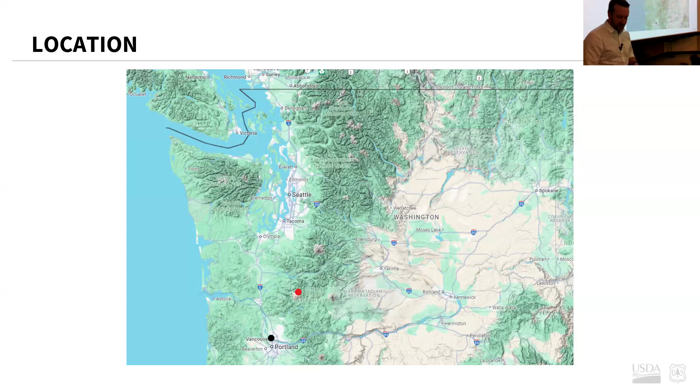So to orient you as to where Spirit Lake is, this is a map of Washington. The black dot down near Vancouver is where our office is located. And the red dot just north of Mount St. Helens is approximately located where Spirit Lake is. So the project is located on the Mount St. Helens National Volcanic Monument of the Gifford Pinchot National Forest. And that essentially means there's a few additional constraints we have with regard to producing projects within the monument that I'll discuss later.

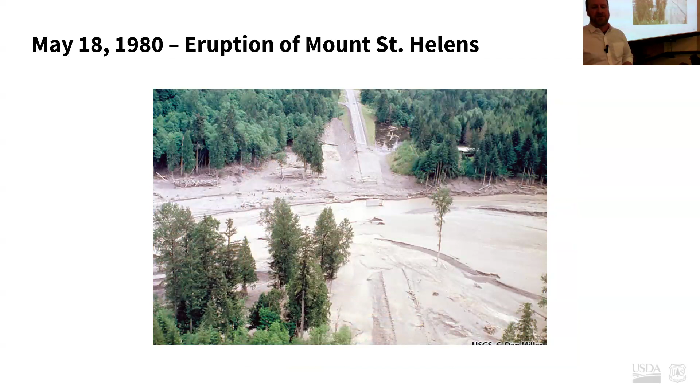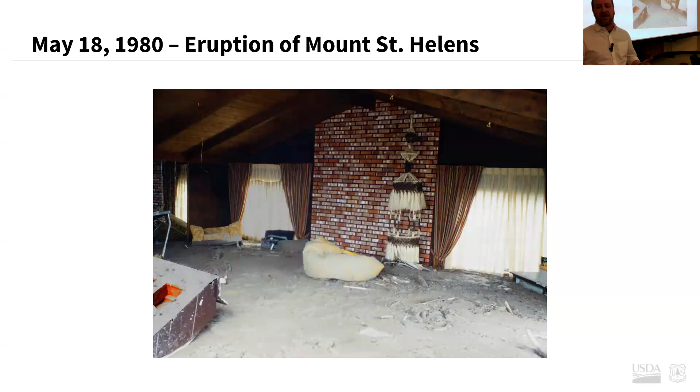So the May 18th, 1980 eruption of Mount St. Helens resulted in some very dramatic changes across the landscape of Southwest Washington. Over 150 square miles of forest were destroyed. Over 150 new lakes and ponds were formed. Rivers changed their courses. The bed of the Columbia River at the Cowlitz rose by 30 feet, and ashfall reached as far as Montana. Additionally, there was a lot of property damage to hundreds of homes, bridges, and roads. Highways were closed for a week, and airlines canceled over 1,000 flights. So pretty big impact to the local area.

Unfortunately, and most sadly, 57 people lost their lives because of the eruption. And even today, it's still considered one of the most disastrous volcanic eruptions in US history. And this last photo just shows some barges dredging the Columbia River post-eruption.

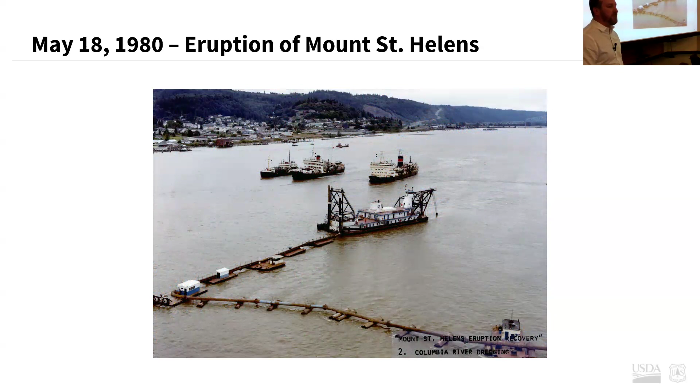Okay, so this video, courtesy of the US Geological Survey, is a composite of multiple images taken during the eruption. I am not a volcanologist, so I will stumble my way through this, but essentially, an injection of magma at shallow depth created a large bulge on the north flank of the mountain. A subsequent earthquake caused the entire weakened north face to slide away in a sector collapse, which ended up being the largest subaerial landslide in recorded history. And I'll just hit play on this again so it keeps looping.

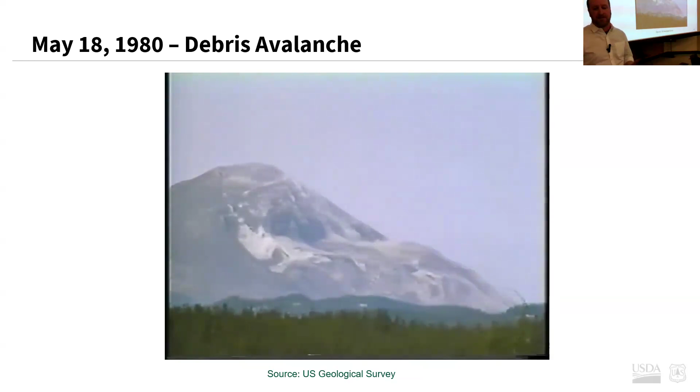So this allowed the partly molten rock, rich in high pressure gas and steam, to suddenly explode northward towards Spirit Lake in a hot mix of lava and pulverized rock, which overtook the landslide. Then an eruption column rose 80,000 feet or 15 miles into the atmosphere, depositing ash in 11 US states, as well as certain provinces of Canada. At the same time, existing snow, ice, and several entire glaciers were caught up in this surge, forming a series of large lahars that reached as far as the Columbia River, nearly 50 straight air miles. It's a lot more in river miles to the southwest.

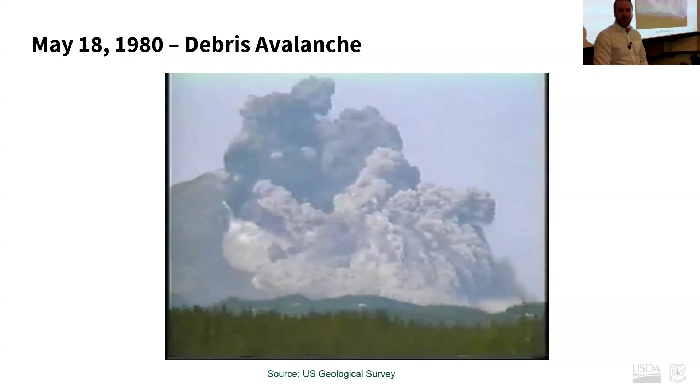It's important to note that the eruption occurred in some separate, what I'll call phases, which I'll describe a little later. And these phases had some very serious ramifications for some of the engineering considerations in managing those geohazards in the North Fork of the Toutle River.

So this map, again from the US Geological Survey, shows just how far reaching that eruption was and how far those lahars went. You can see in this image, lahars went down both the South Fork and North Fork of the Toutle River, where they converged, entering the Cowlitz, going both upstream and significantly downstream to the Columbia, where that lahar actually flowed upriver quite a ways. So a lot of energy in the system to enter into a river like the Columbia and move upstream.

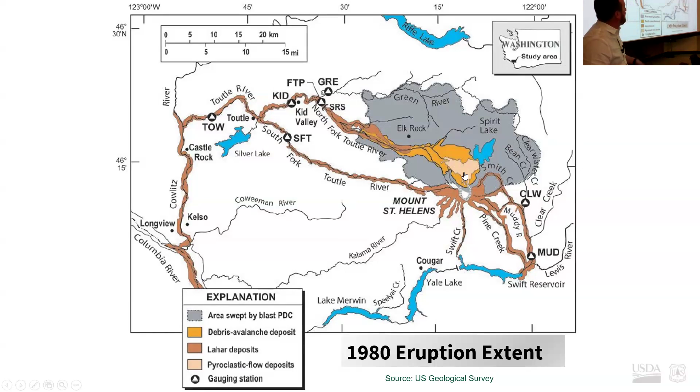So the rest of this presentation really is going to focus on this debris avalanche that resulted from the eruption that blocked the natural outflow of Spirit Lake, which was the North Fork Toutle River Valley. And here where the USGS has mapped debris avalanche deposits, that's pretty much the entirety of the debris blockage that we'll be talking about later today that blocks Spirit Lake to the North Fork of the Toutle River.

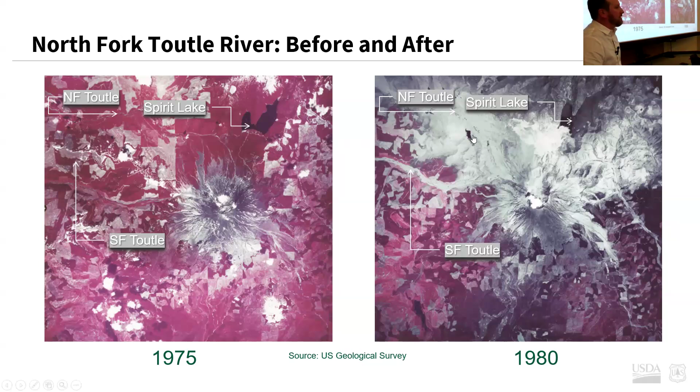You can see the debris or the lahar that went down the South Fork and North Fork of the Toutle. And it's maybe not so obvious in this photo on the right, but you can see that the area of Spirit Lake was increased substantially. We'll talk a little bit more about that. And then this little feature here stands out as well. I'll discuss that in a minute.

Just another aerial image, showing what the lake looked like pre-eruption versus post-eruption. Again, I think this image really shows just how much that area changed, and there was subsequently a volume change associated with a 200-foot raise of the bottom of the lake elevation. So it went up 200 feet, and the landslide or the debris blockage that ended up blocking the lake is about 500 feet, give or take a few tens of feet, thick at its maximum downstream of the lake.

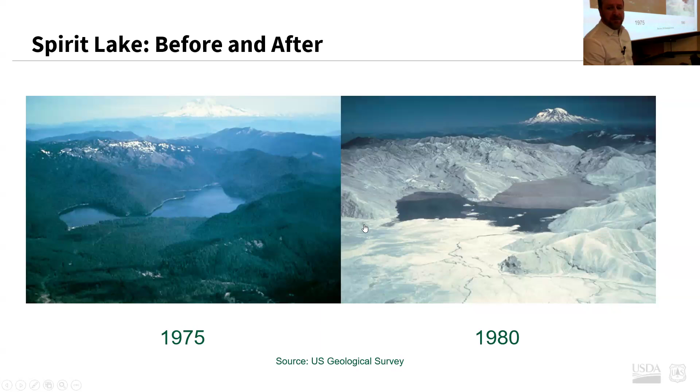So I pointed out a unique feature in one of those false color images previously, and that was Castle Lake. So in addition to Spirit Lake being raised up, increasing its volume and area, it actually created two new lakes. Prior to 1980, Coldwater Lake and Castle Lake did not exist. In this Google Earth image, you can see the maximum downstream extent of the debris blockage. Toes here. If you've ever been up to Johnston Ridge Observatory, this is State Route 504 that will get you up to Johnston Ridge. And basically the end of the Hummocks Trail is right in here. So if you're familiar, that's what we're looking at. So we went from one lake to three.

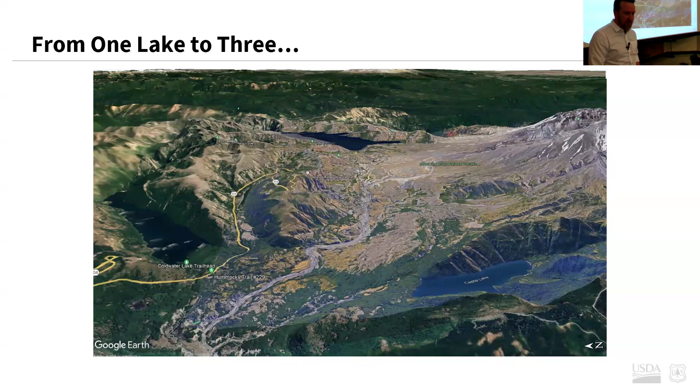I won't go into great detail here, but in addition to managing Spirit Lake, the U.S. Army Corps of Engineers also constructed outlets for both Castle and Coldwater Lake that require annual inspections. My understanding is that Coldwater Lake is founded on some really good rock, so the channel is very stable, whereas Castle Lake has a similar material characterization to the debris blockage. So we do periodically inspect and monitor for that. Fortunately, we haven't had any events. USGS has done some modeling of Castle Lake, and from what I've been told, it's not nearly as dire a situation as a catastrophic breach of Spirit Lake. But nonetheless, we still monitor those two lakes as well.

So I'd like to quickly go back to the comment I made earlier about the eruption occurring in phases. This figure from the USGS shows that there were three distinct phases of the eruption. The first was that debris avalanche that consisted of large blocks of the inner and outer edifice of the mountain. The second phase was a lateral blast in the form of a pyroclastic density current, or PDC, which was directed northward, which resulted from a large release of volatiles from the sudden unroofing of the magmatic and hydrothermal systems within the volcano. And then the third phase of the eruption was the billowing column that deposited a significant amount of ash over the top of both of those deposits.

And then there were several later pyroclastic flows, over the course of definitely a few months, possibly up to a year, that continued to slough off down the mountain, adding more fine-grained, highly erodible material on top of that debris blockage.

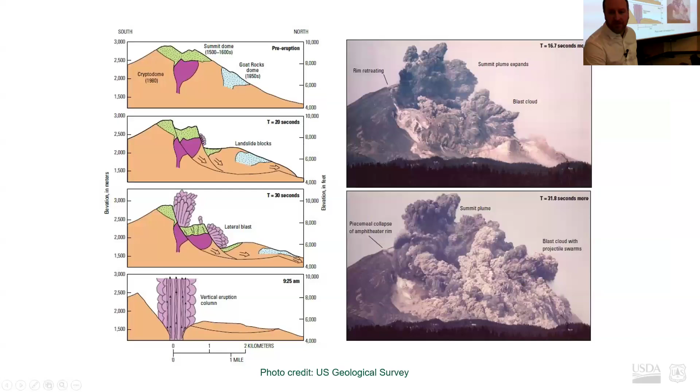So the end result of that eruption essentially became an unengineered earthen dam holding back a much larger volume Spirit Lake. And because of the differentiation of material between the initial and subsequent eruptions, the resultant engineering characteristics between the debris blockage layers is highly variable, as you can see from this table that kind of shows the constituent parts of those deposits. The debris avalanche itself is dominantly heterogeneous, gravelly sand.

Sorry, actually went to the wrong slide there.

Yeah, heterogeneous gravelly sand, but contains silts and clays, as well as rocks that are several feet in diameter. The blast deposit consists of a lower unit of angular, unstratified, clast-supported rock debris larger than coarse sand, which is overlain by an upper unit of silt to sand-sized sediment composed of ground-up bits of rock. And lastly, the ash cloud deposit is composed mainly of sand and silt.

And so due to concern that rising lake levels could eventually either overtop this loose, unconsolidated material, or that seepage and piping could potentially initiate a nick point that could then come back towards the lake, the U.S. Army Corps of Engineers, U.S. Geological Survey, and others basically said, hey, we should probably characterize this debris blockage, figure out if this is a big concern, and we probably should do something about it.

So they did some early geotech investigation in the 80s to characterize that blockage. They identified the contact boundaries that you see in this diagram and elevations for each of those layers. They conducted hydrogeologic and seismic modeling to develop conservative, maximum safe levels of that lake. So those initial 1980s design assumptions are still in place. So some of those lake levels are still founded on work by John Sager and others from the 1980s. And so basically they said, yeah, this is a concern.

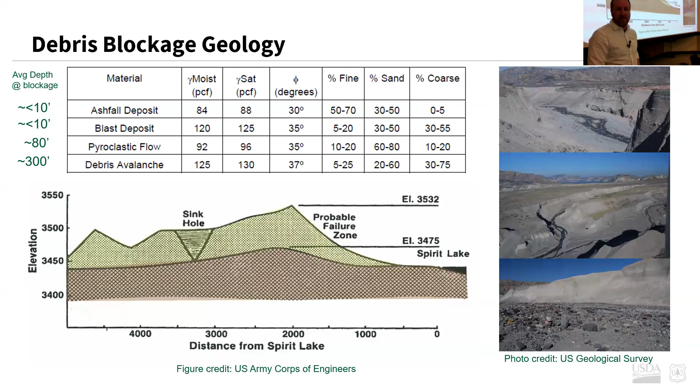So initial inundation mapping conducted by Swift and Kresch in 1983 from the U.S. Geological Survey, as well as a recent study that the USGS has currently got pending review, indicates that a hypothetical breach of the debris blockage would essentially follow the exact same path of the 1980 eruption. And so what you're seeing here on the left is just a plate that shows all of the other plates of inundation maps that were created in 1983.

On the right, what you see is the inundation map for the Longview area. So down here on the left, if you've been to Longview, this is the wagon wheel in town. And anything in between these two lines is indicated as being inundated by floods. I don't know if folks online or anybody in the room can read the graph, but right about here, this indicates that the depth of the mud flow at this location, right when it comes out of the Cowlitz River Valley into Longview, would be 60 feet in depth.

So very substantial. And the reason for that is there are many downstream populations at risk that include Toutle, Castle Rock, Kelso, and Longview, with a combined population of over 50,000. That 50,000 is an old statistic. I want to say it might be closer to 75,000 today, but there's a lot of people down there.

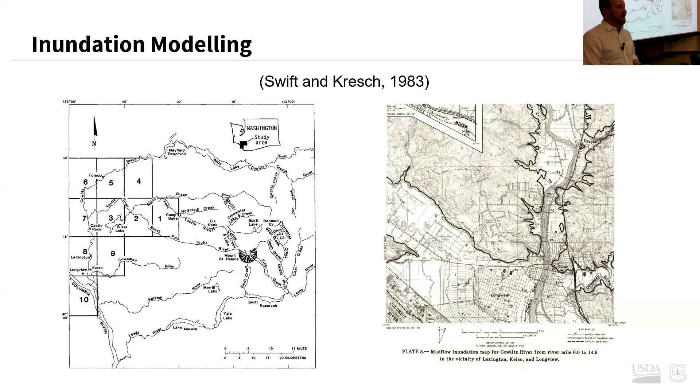And elevations determined by the hydraulic routing of the mud flow were used to prepare these maps. And essentially, it would be 60 feet of depth at Castle Rock and Lexington, 30 to 40 feet at Toutle Lake and Kelso and Longview, and 15 to 20 feet in Toledo. So obviously a very high hazard with a high potential for damage and loss of life.

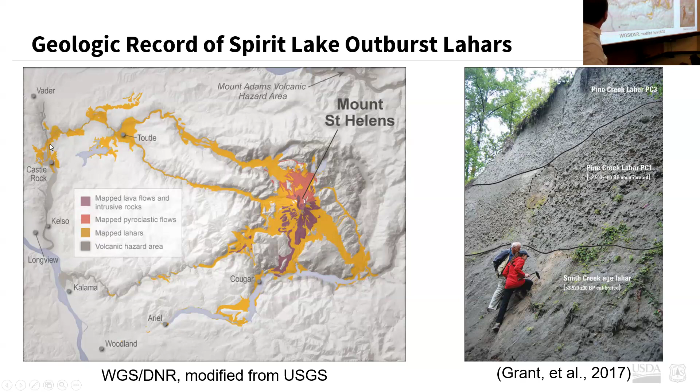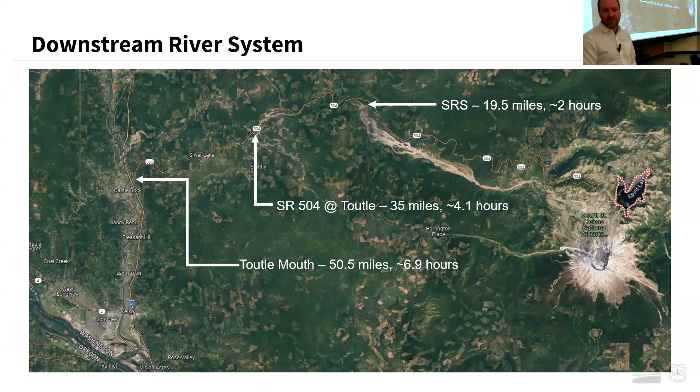But in addition to the populations downstream, there's a lot of other stuff besides the SRS. There's a lot of recreational facilities both on and off of National Forest System lands. And there's a significant amount of critical transportation infrastructure, including Interstate 5, Washington State Route 504, railroads, shipping channels, and port facilities. So yeah, it's risky.

So understanding that an engineered solution would take a significant amount of time to produce conceptual designs, conduct field reconnaissance, perform geotech investigations, and provide initial through final design, and then finally complete environmental permitting, scientists and engineers understood that they needed an interim solution to manage Spirit Lake before they could design and construct the final solution. So what happened was they mobilized, they built a pumping facility, and this facility included 20 large barge-mounted 10-inch pumps that were capable of producing 110,000 gallons per minute or 245 CFS.

And the pumps discharged lake water into a 5-foot diameter, 3,500-foot long buried conduit, which then entered into a stilling basin before being discharged back into the North Fork of the Toutle River. So as you can imagine, trying to mobilize this amount of equipment and supplies and build it across a devastated landscape, even just getting there, building the road to install these facilities was quite the feat of engineering that continues today.

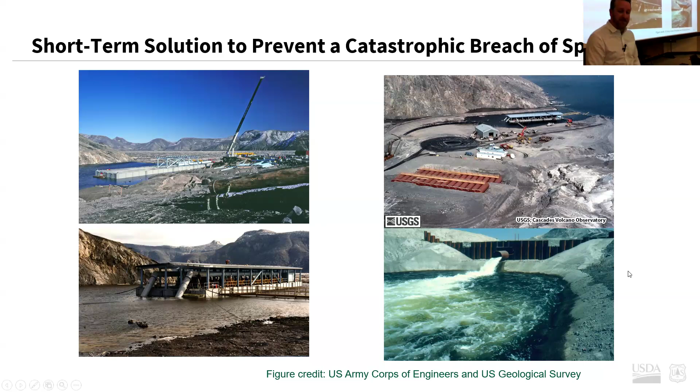In 1982, just so happens to be the year that I was born, at the direction of President Ronald Reagan and the Federal Emergency Management Agency, the U.S. Army Corps of Engineers, in consultation with the Forest Service and U.S. Geological Survey, initiated planning to develop a long-term solution to managing water in Spirit Lake that would prevent that catastrophic breach of the debris blockage.

But yeah, where was I?

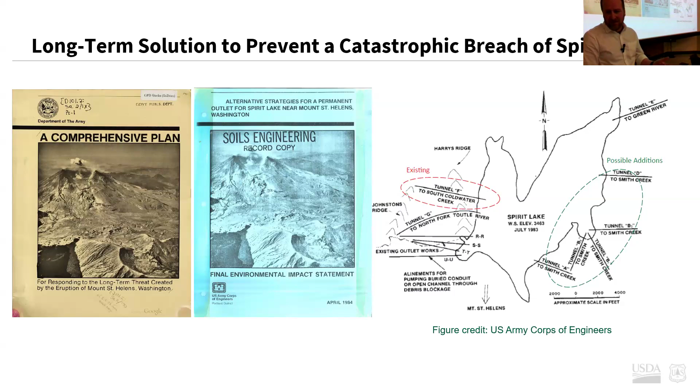Yeah, so they ultimately landed on the Spirit Lake Tunnel. So in order to build this thing, they started construction July of 1984 and completed it relatively quickly in April of 1985. The construction primarily used an 11-foot diameter tunnel boring machine, or TBM, and then 3 types of tunnel support systems were used depending on the rock conditions they encountered.

The entire tunnel invert, or the bottom of the tunnel, was lined with precast or cast-in-place concrete, and in good rock, which was about 55% of the tunnel, they didn't use any treatment on the walls or the crown, so it's basically just open rock. It was decent rock. In fractured rock, which was 35% of the tunnel, the walls and crown were covered with a minimum of 2-inch steel fiber reinforced shotcrete, so basically just getting across the walls, keep the spalling down.

And then lastly, in sheared rock, which is the worst rock type they encountered, which accounted for about 10% of the overall tunnel, a rib set shotcrete support system was used for the walls and the crown with a 285-degree coverage on the walls and the crown. So tunneling progress when they built this thing was pretty good, with the exception of what they call the JKL. I believe it stands for Julie, Kathy, and Linda. I don't know if they were geologists or drillers, who they were, but these ladies got a shear zone named after them. So the JKL shear zone, which I'll describe in the next slide.

And so prior to encountering this shear zone, their tunnel advancement rate had been 5,834 feet in 11 weeks. However, once they reached the JKL shear zone, the TBM got stuck for 2 days, and it took 4 weeks to advance the next 235 feet. So yeah, pretty substantial change in the rate of advancement for that TBM.

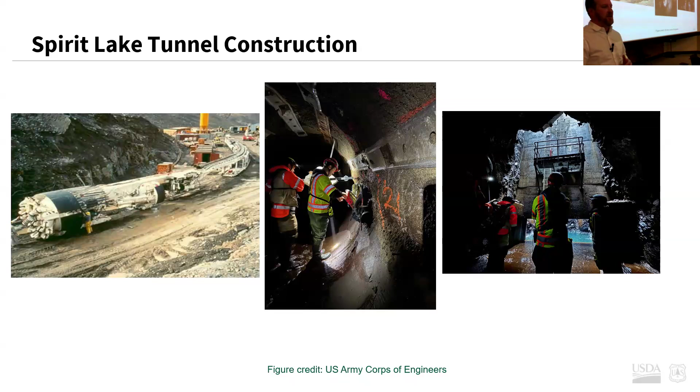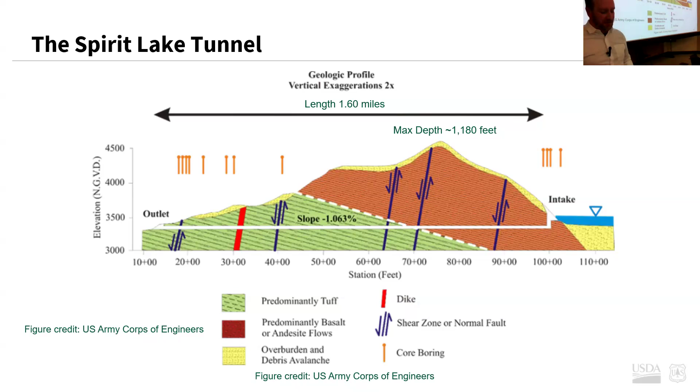So in an emergency, we have to get across Spirit Lake. That sounds like it shouldn't be a big deal, but other than the 1980 road that has been rehabilitated after they did the pumping station and completed the tunnel, we have to take a road that has been closed for a long time. We had to rehabilitate several miles of this road to get heavy equipment, other things down. Then we built a UTV trail by hand, mind you, which every year we get these massive flows coming out of the volcano, covers this thing back up. We can't take equipment because it's in the Mount St.

Helens National Volcanic Monument. So I get to take a crew of people once a year, go out and do manual labor to clear this thing out. It's quite impressive. It usually takes a full day, but sometimes more. So then once we get down this UTV route, we then transfer into a boat, which we couldn't drive down there. We had to get it airlifted in with a helicopter.

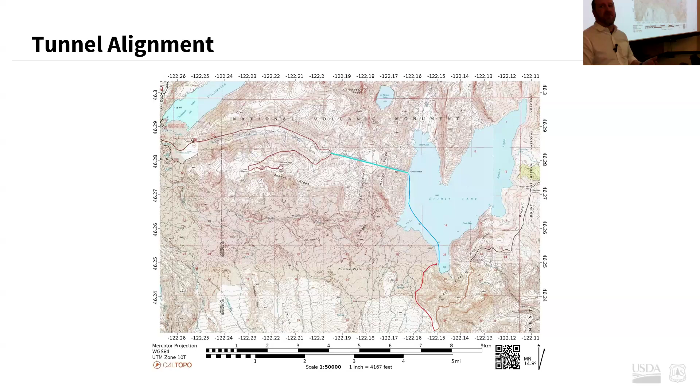I might have some photos in this later for you to show those conditions. But yeah, that's what I wanted to show on this. So when we talk about the long-term outflow solution, for us, access is a critical component of whatever we end up deciding on for an alternative.

But what's important to note here is that we have a single fracture critical steel gate on this thing to operate, to keep the flows. We keep it open all winter long so that as we get those typical winter storms, the lake level can come up, but then get out of the lake and keep the levels down. But one time we did an inspection a few years ago, and an Army Corps of Engineers structural engineer was looking at that gate and said, "Why would you guys ever get behind that thing?"

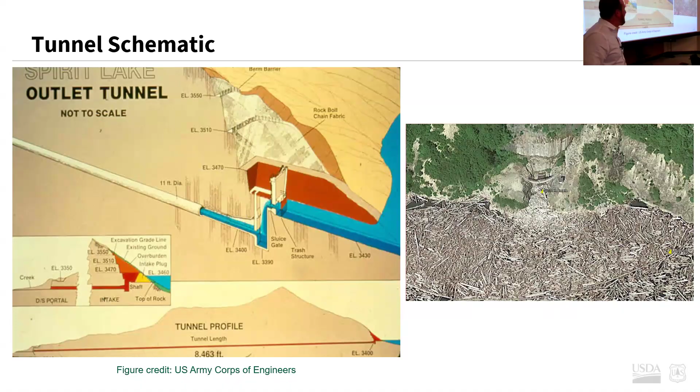And that was the impetus for a $30 million project that we're currently working on to replace this single fracture critical gate with a double redundant 4-gate system. So I could go on a lot about that project as well, but in the interest of time, we don't have it. So. All right.

The heave began long ago due to high ground pressures, the weakness of the sheared tuff dipping beneath the tunnel, the adverse orientation of fractures in the basalt, and the absence of those steel rib sets that I mentioned earlier. So for several years, the amount of heave remained very steady at about 24 inches. The distress was limited to the tunnel invert, so we didn't see anything on the walls or the crown. It literally was just coming up off of the floor.

So the ramification of having a smaller diameter tunnel is that we can no longer operate that at maximum design outflow capacity, which, if we have a very significant hydrologic event in the Spirit Lake Basin, it could exceed our ability to pass that through the outflow.

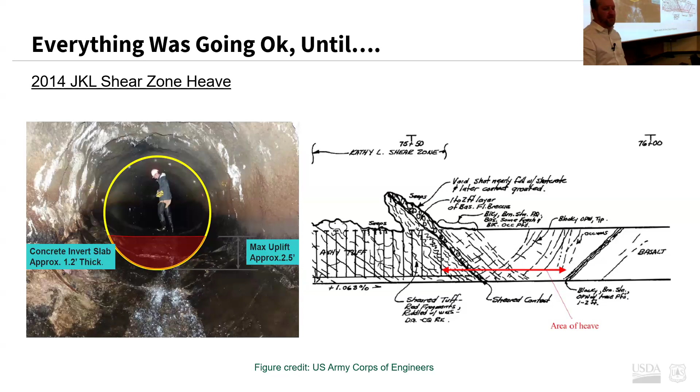So then Congress got involved. This is really when the agency started making a lot of moves to get some things done. So on September 24th of 2015, we received a letter from Representative Jaime Herrera Beutler, Senators Patty Murray and Maria Cantwell, directing the Forest Service, Army Corps of Engineers, and US Geological Survey to develop a long-term resilient solution for management of lake levels, which led again to significant agency efforts to establish baseline information and initiate that planning.

The Forest Service requested the National Academies of Sciences, Engineering, and Medicine to convene a committee to help develop a decision framework, because I won't go into a lot of the politics behind this, but there are a lot of interested parties, a lot of regulatory management, a lot of private interests downstream of National Forest System lands. So ultimately, the Forest Service has the sole responsibility of making a decision that impacts 1 million people who have 1 million opinions on how this should be managed.

So I won't get into it too much, but that's what NASEM, or the National Academies of Sciences, Engineering, and Medicine, helped us figure out. And they gave us this decision framework for managing Spirit Lake. If you ever want to know more than you ever care to know about Spirit Lake, this document, and then this one here by Gordon Grant and John Major, and I apologize, I forget the third off the top of my head, I think Sarah Lewis maybe, are very comprehensive about Spirit Lake and the debris blockage. So yeah, more information, highly recommend those documents.

But yeah, this was the impetus for us to start our planning. So that's what we're currently doing now. And our project objective is to create a long-term outlet configuration that removes that threat of the catastrophic release for Spirit Lake. So we call this the Spirit Lake Outflow Safety Improvement Project. I just like to refer to it as SLOSIP because it's a lot easier to say. So yeah, we started that in 2020. We awarded a $2 million contract to prepare an environmental impact statement to comply with the National Environmental Policy Act.

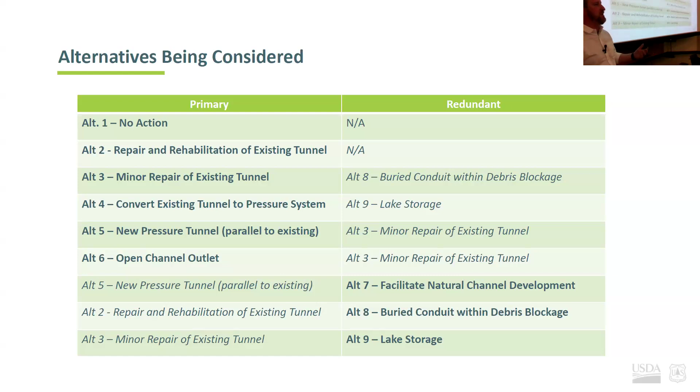They considered several outlet options. Some of these are still there. So previously I mentioned a buried conduit. I talked about a permanent pumping station, talked about an open channel. All those were kind of carried forward. And the NASEM Commission also identified a few options that should be considered for long-term management of risk. So again, apologize for the wordy slide. I'll actually describe these in a little bit more detail in the following slides.

So the National Environmental Policy Act requires a no action alternative be analyzed to show how doing nothing would fail to meet the purpose and need of any federal project, which in our case is again creating that long-term resilient outflow that removes that potential threat. So by doing nothing, essentially we're telling the public that we wouldn't be able to do that. We can't reduce your risk if we don't do anything. We have to do something.

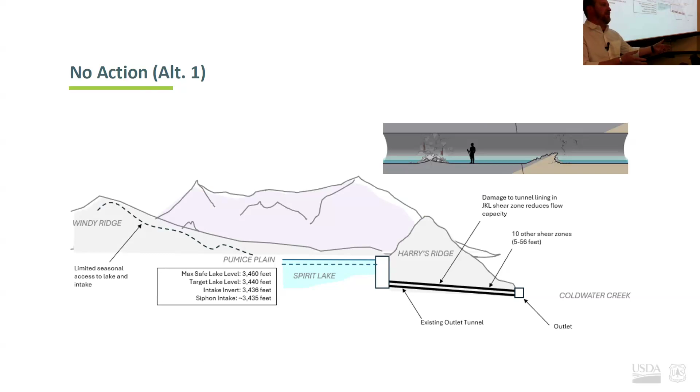And again, the no action alternative also gives you a baseline to compare effects. So what would the effect of not doing anything be on the community versus what you're planning to do? So alternative 2 is the major repair option. This is a full rehab of the existing tunnel, including enlarging that constricted JKL shear zone to restore our full tunnel capacity. The shear zone would be using the same methods that they used before to repair those rib sets, and they would just extend that out. Alternative 2, coincidentally, does not include a redundant option.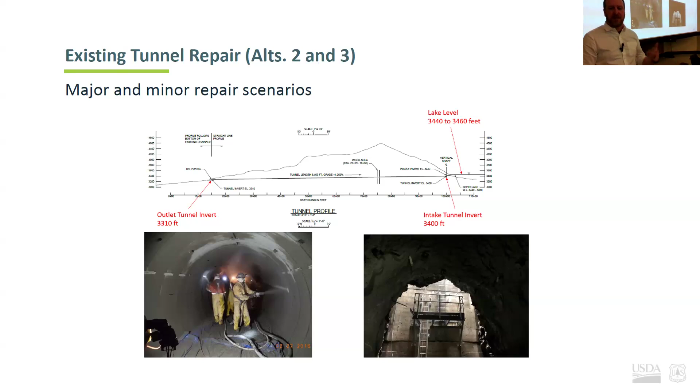Alternative 3 is a minor repair option that would focus only on that JKL shear zone, and it would construct a buried conduit across the debris blockage. So essentially, if you think about a concrete box culvert, it would just be buried and connected across the debris blockage. That would be the redundant measure. And then that essentially would follow the existing path of the old disturbed area from the 1980s pumping station.

So alternative 4 is to convert the existing tunnel into a pressure tunnel. Essentially the difference between a pressure tunnel and a gravity tunnel is that with a pressure tunnel you can control the bottom, you can fully fill the tunnel and pressurize it. So it allows you to get, number one, higher discharges, and we could access it from SR 504. So that accessibility is a major consideration for us.

In addition to those considerations, it also would lower the intake level, which would then also allow us to lower Spirit Lake below 3440. And the reason we're stuck at that 3440, as I showed the inlet earlier, that excavation is actually graded towards the lake. And so that maximum elevation before it gets into the intake is 3440. So by putting in the pressure tunnel, we could excavate that out, lower the intake slightly, and we could lower the lake a little bit more to buffer those intense hydrologic events that could come in.

There's a lot of other considerations that I won't go into great detail. The log mat, though, is one of them. So anything that goes into a pressure tunnel has the potential to do catastrophic damage. So it would take a lot of work on the front end to make sure we don't get anything going into the tunnel.

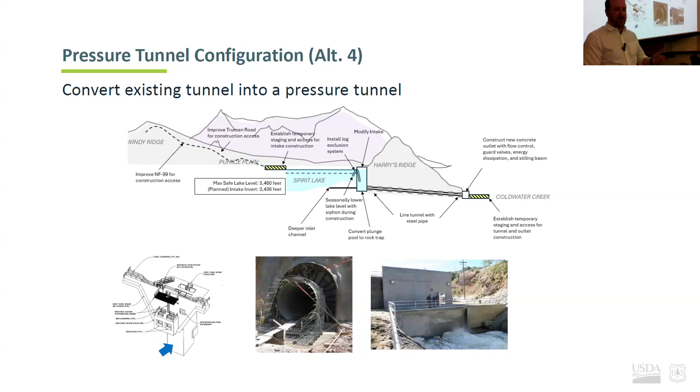So alternative 6 is that large open channel that would maintain Spirit Lake at its current operating level of 3440. Based on preliminary alignment, it looks like this open channel would be 6,450 feet long with cut slopes up to 250 feet vertical. Massive, massive cuts in what is presumably very unstable material that has not been characterized. So a lot of unknowns on that one.

But the benefit of this measure is that channel flow capacity would scale with lake level and really is only limited by channel dimensions. So rather than having to worry about the lake level rising, the lake would just flow out even if we do get those extreme events, much like a natural river system would. The channel would require channel bed reinforcement to provide that erosion resistance to prevent a nick point from coming back up, retrogressing and releasing the lake.

So here's the really big one, Scott. Channel construction would excavate 11 million bank cubic yards, which would result in 22 million loose cubic yards. That's enough to fill Spirit Lake. And where do you put that much stuff? And just the infrastructure to haul it out, that heavy haul equipment, you need a massive, beefy road. And we don't have a location where we would put it. So we are still considering this option. It is viable, but obviously a lot of things to consider before we could do that.

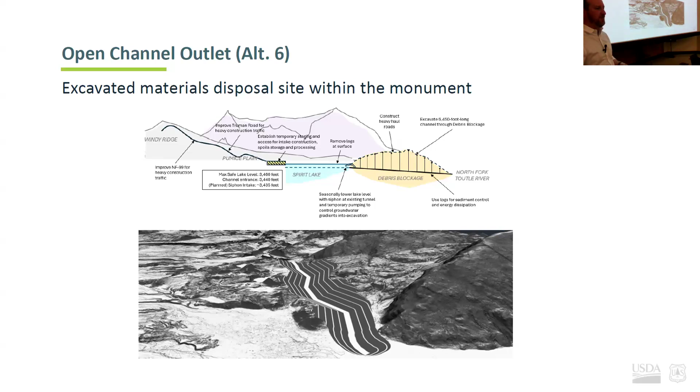And then the backup for this one would be that we would use the existing tunnel as that backup. So if for some reason that channel failed, or let's say there was another lahar that blocked it, a debris avalanche that brought us back to the same situation, we would still have the existing tunnel as an alternate.

All right. So then alternative 7 is a natural channel development. We would include a new pressure tunnel, which would follow the existing alignment of the current tunnel. The reason being is that it's already been well characterized.

We understand the geology really well, so that is like an ideal location to put it. And then we could use the existing tunnel as a backup as well as access. And the interesting thing, our consultants kind of came up with this in talking with some of the folks that are on one of our collaboratives. Colin Thorne does a lot of sediment modeling, kind of pitched this engineering with nature idea.

But essentially what you could do is there's a series of depressions across the debris blockage. And if you were to initiate some natural channels to kind of connect these, you could potentially, with the use of a siphon, put water through this, controlled over time to kind of slowly start initiating a natural channel. And you would still have, again, your pressure tunnel and existing tunnel as a backup outlet.

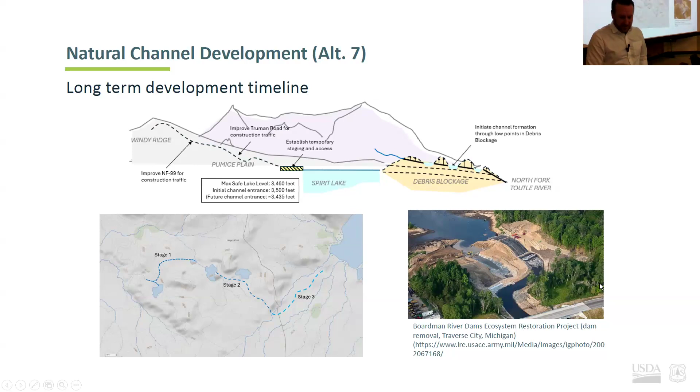And over time, you could release water out of the end of that conduit. As the erosion from that flow coming out of the end of the conduit stabilizes, you could then excavate that next upstream section of conduit, remove it, allow it to do the same thing, controlling those flows. And so you could stage letting hydraulic excavation work naturally in your favor.

The obvious ramification of this is that all of that sediment from that debris blockage that you hydraulically excavate out, where does it go? Right down to the Columbia River. So yeah, that is alternative 8.

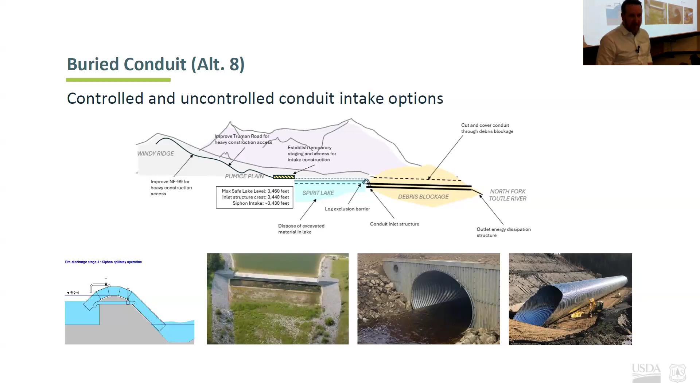Lastly, alternative 9 would basically reevaluate the debris blockage stability by conducting updated geotech investigations that would gather data in support of updating groundwater and seismic modeling. And if the results of that updated modeling indicate that conservative design assumptions made in the 80s are no longer valid or just didn't come to fruition, then it may be possible to increase the maximum safe operating levels at the lake, thus increasing the storage buffer to accommodate those extreme hydrologic events.

However, this would require a complete redesign of the current intake structure. And we may have to do additional stabilization at some of the critical low points, which are shown on the right here, critical point north and critical point south. This LiDAR image just shows the lake level if we were to raise it up to 3480, which is currently 40 feet higher than our current operating level.

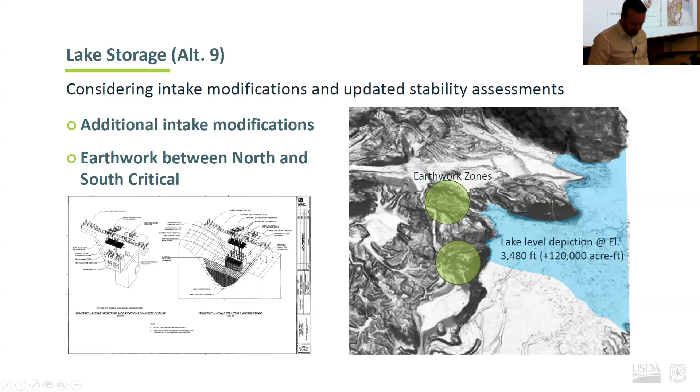And then this image put together by our contractor just shows most of these options. So again, here's the south shore of Spirit Lake. Mount St. Helens is just to the south off of this image. The crater would be somewhere kind of down towards the bottom of the page. This shows the open cut, those 250-foot high excavation slopes where we could potentially put some engineering with nature type things.

This road is the one that we actually completely rebuilt as part of that $30 million intake gate replacement project. So this was just completed this summer. So it currently exists, but our previous NEPA indicates we will reclaim that. So the jury's still out on what we're gonna do with that road, I guess.

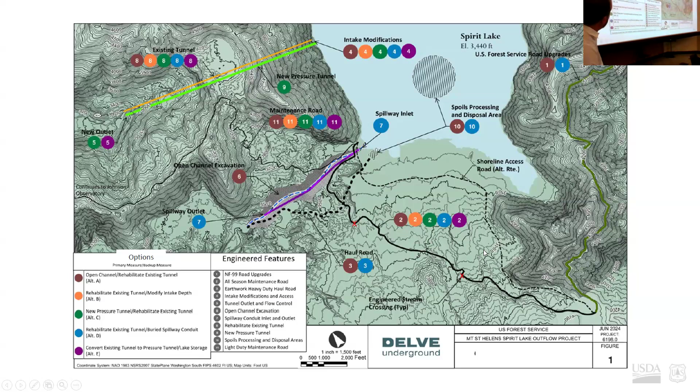So moving on. I'll kind of quickly breeze through the last of these because I realize I'm almost at time and don't want to belabor this too much, but when you're thinking about any of these alternatives, there's a number of risks that you have to consider, including natural hazards, construction risk, outlet performance, any environmental risks, which again, we might elucidate in the environmental impact statement. There are obviously implementation risks, which are unintended consequences requiring future mitigation.

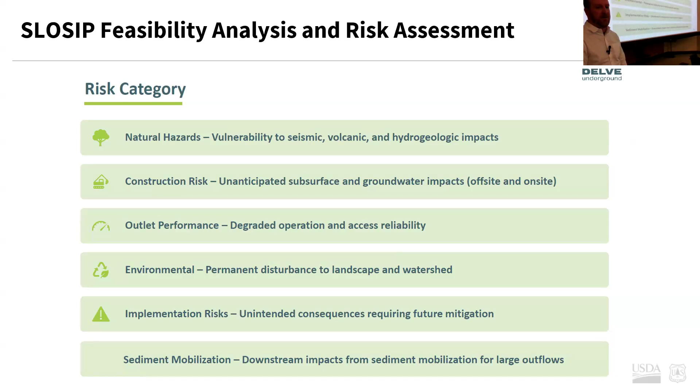And we decided to pull sediment mobilization out of the environmental, and I'll talk a little bit about that when we get there. But natural hazards include all the processes that could be reasonably expected to occur on the flanks of an active volcano, including those initiated from extreme hydrologic events, geologic processes, including local and regional stresses, mass wasting events, volcanic processes, and seismic, whether local or regional.

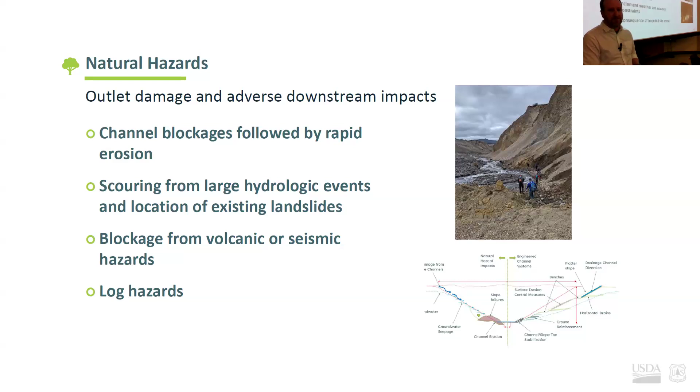As indicated on this slide, any of these construction risks could lead to significant increases in overall project costs, which underscores, in my opinion, the critical importance of a thorough surface and subsurface site characterization program. If you guys in your future career ever get pushback on how much you want to spend to do a geotech investigation, just remind them of some projects. You'll find them, about when they didn't do it right, how much it ended up costing them. So always push for more than you're going to get approved for.

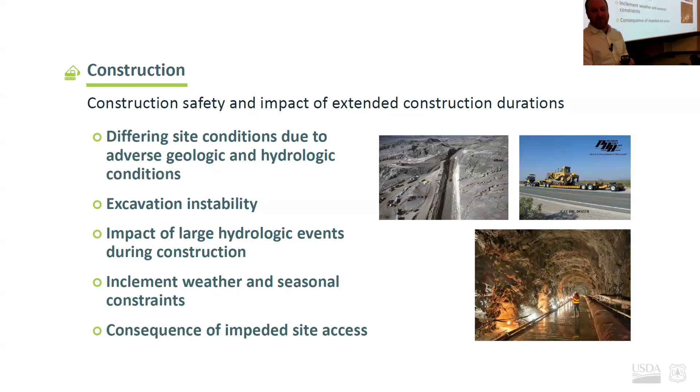Where was I? Yeah, so given the time frame required for such a large cut, it could take multiple seasons to complete construction, and you'd have to winterize the site, so you'd have to pay really good attention to ensure that critical measures are put in place to not lose your previous work that's been done in a mountainous weather environment. Regardless of the option chosen, they all have trade-offs and performance measures.

For example, an open channel would obviously be more vulnerable than the existing tunnel to a debris flow initiated from the crater of the volcano. A tunnel bored in competent rock might be less prone to damage. Sorry, I'm losing my spot here. During a seismic event than would cut slopes in an open channel.

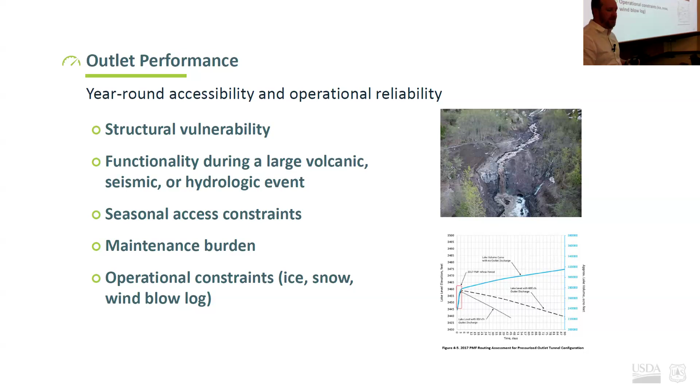And yeah, a pressure tunnel configuration with outlet valves located near the current outlet would be way easier for us to access than the existing gate control inlet. However, with increasingly complex systems, there's more maintenance, there's more costs. So every consideration, every risk has a trade-off. And to balance all of these for a project of this magnitude is definitely tricky.

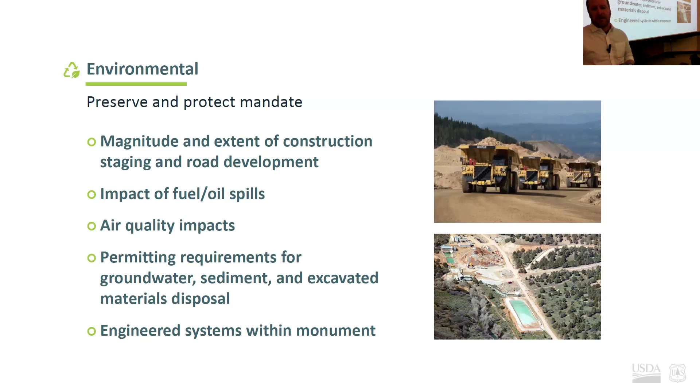Again, talking about NEPA, if any of you end up working for the federal government, you will do NEPA. The agency is required to disclose those impacts. And so additional resource considerations that are not listed on this slide include impacts to wildlife, socioeconomic impacts on local communities from the project either occurring or not occurring. And so, yeah, lots of things to consider in the environment.

Implementation risks, obviously, I didn't talk much about it in this talk, but the NASEM committee, again, identified several federal, state, local jurisdictions that would be impacted by any alternative we choose. Again, everybody's going to have an opinion. And balancing risks and trade-offs to all of these stakeholders and the resources that they value most is an incredibly challenging task. And I'm really glad that I don't have to actually make the decision on which alternative is going to be chosen.

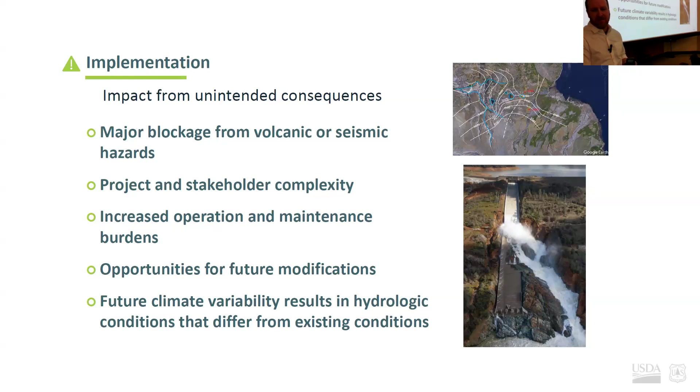Yeah, sediment mobilization, I'll just very briefly touch on. The reason this is so important is that the forest boundary of the National Volcanic Monument is only 10 miles downstream from Spirit Lake, where it then transitions into state and private ownership. And the U.S. Army Corps has that sediment retention structure. So anytime you propose a federal project that could impact their investment, whether that's a dam, whether that's flood control levees, you have to go through the Section 408 process.

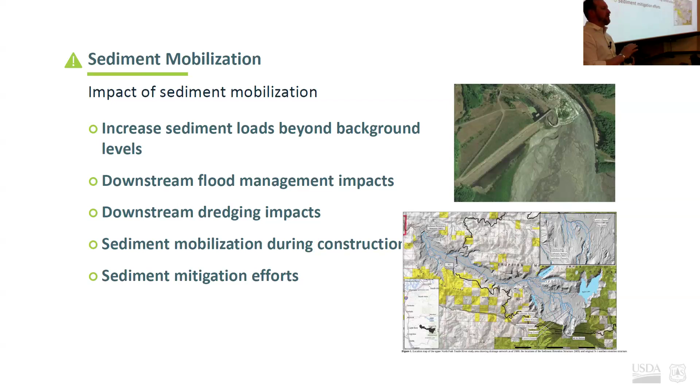And basically what that entails is you give the Army Corps of Engineers a 95% level design, then they tell you whether or not you can do the project. And they have the sole authority to do that. So sediment mobilization for downstream infrastructure, not only for the Army Corps, but the communities downstream, is incredibly important.

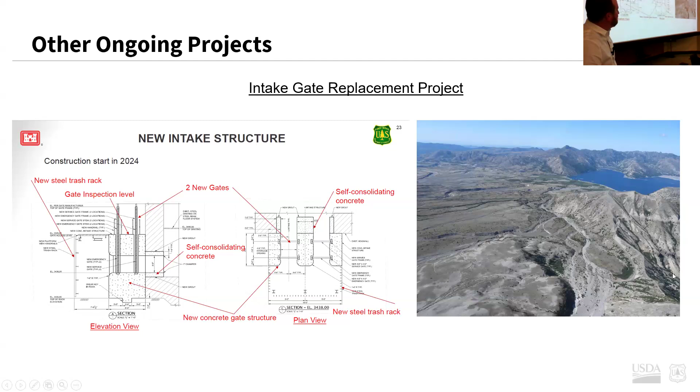I talked a little bit about one of the other ongoing projects that we have, that $30 million intake gate replacement project. This just shows a schematic. This is a plan view. This is an elevation view showing those two flow paths with a redundant gate for each path. And then the image on the right just shows that 1980s access road, we call it the Truman Trail, that we kind of reestablished. We're actually building a barge loading facility, much like they did in 1980, to then create a coffer at the inlet, dewater it, do the construction for the gate. And yeah, that should be completed in FY27.

So that was a lot. I thank you all for bearing with me, and I'd be happy to take any questions you might have.